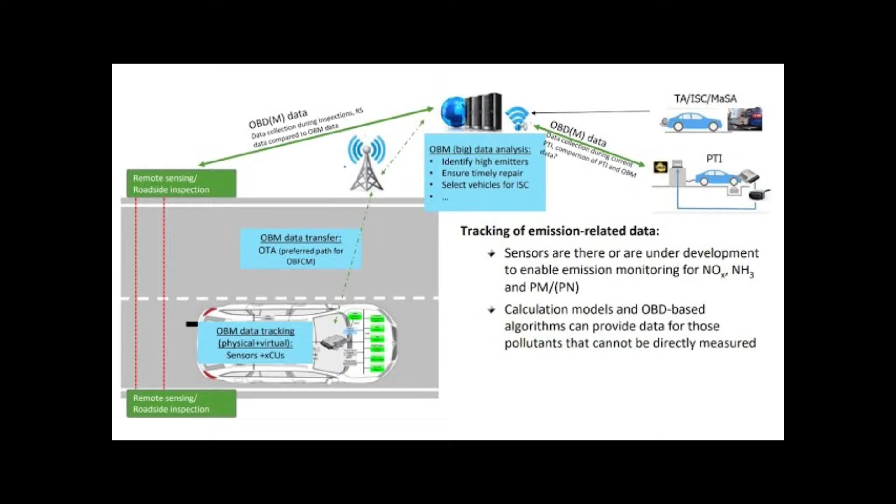We are very glad to host for this first speech of this year Professor Zisis Samaras from the Department of Mechanical Engineering of the Aristotle University of Thessaloniki in Greece. He's heading the Laboratory of Applied Thermodynamics there. He has been mainly working over the last decades on vehicle and engine emissions of air pollutants and greenhouse gases. He has led several big European projects.

He has consulted, he has advised the European Automobile Manufacturing Association, the oil industry, and the European Commission, and also national governments. And he has also co-founded 3 spin-off companies on exhaust gas after treatment, on calculating transport emissions, and on biomass gasification. So I think he can very well talk to us about technology-driven policy research and technology-driven innovation. I cannot pretend to call him Professor Samaras, so Zizi, the floor is yours.

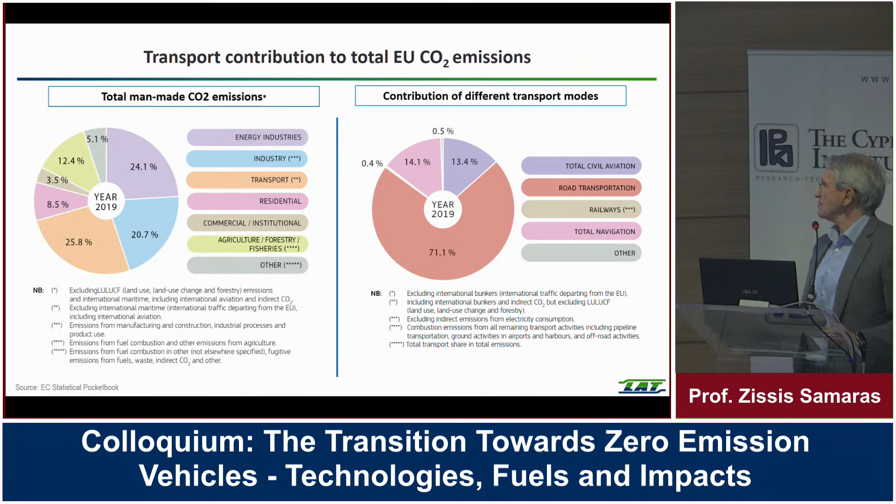And if we look at the evolution of greenhouse gas emissions from transport over the EU27, from 1990, which is the base year of all the calculations, until almost 3 years back, 2019, where our detailed statistics stop, you will see that we have some sectors or modes that are decreasing, railways in this case. Some others are increasing very fast, like aviation, as you would expect, and road transportation, which is the most important here, is fluctuating, going up and down, but at relatively high levels.

And if we go to the detail of road transportation, again, light-duty trucks and cars are the ones leading the increases. What is not shown here is the absolute numbers. Light-duty trucks do increase, however their number is small. Why do they increase? Because delivery has increased a lot over the last years and is expected to increase even further.

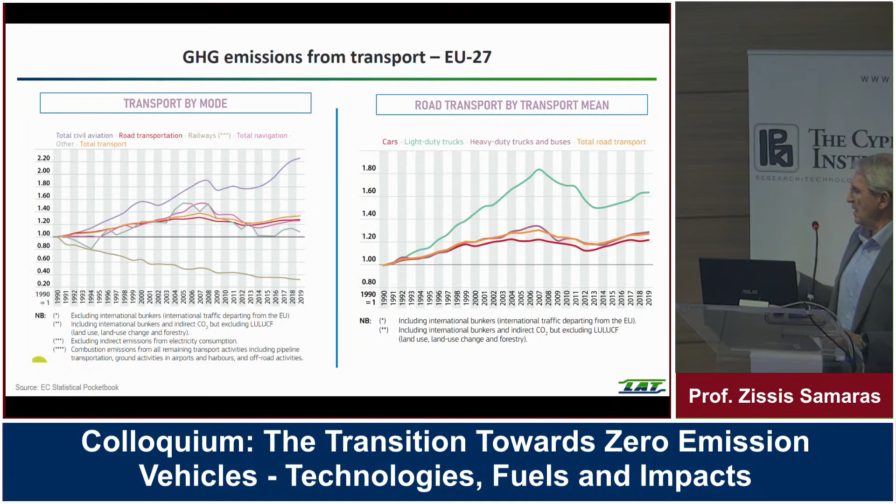As Thodoros kindly said in the beginning, we have a group in Thessaloniki that has been involved over the last 20 years in supporting the European Union as a whole, in particular DG GROW, but also DG Environment, in setting regulations, in conjunction also with the industry, both the automotive and the oil industry. We largely support our activities with a modest but up-to-date testing facility that includes 2 chassis dynos for cars and motorcycles and engine benches to make detailed measurements and analysis of energy flows and emissions from engines, looking at particular topics like cold startability.

And recently, we have been launching ourselves into electrification, looking at battery electrothermal testing, going much more into the detail of electrified vehicles, while we are always very much interested in looking at the real performance of vehicles on the road, not only in the laboratory, but also seeing what happens under real-world conditions on the road.

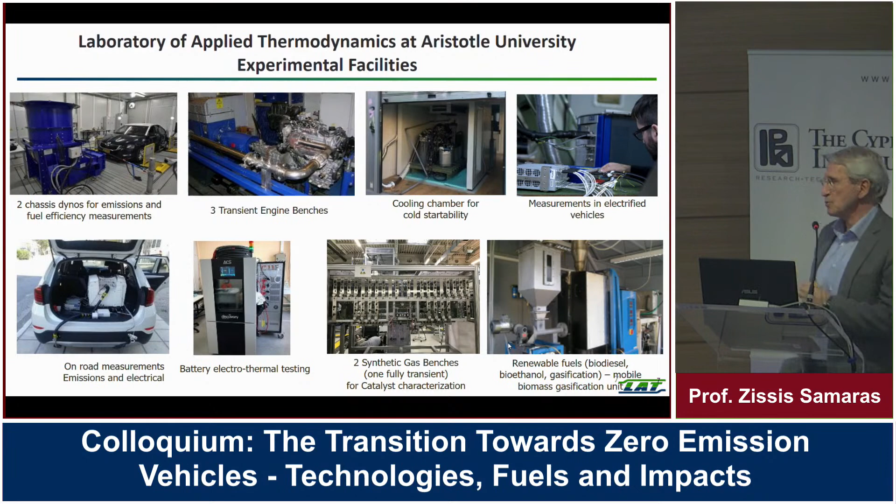And we have been looking at renewable fuels from the beginning, always in conjunction with the internal combustion engine, because the internal combustion engine is a very good device that is in a position to use energetically things that are not easily usable under other conditions. For example, gasification of biomass, which means turning a solid fuel into a gaseous fuel in order to be energetically usable.

As we have been evolving, we decided to set up as a group a spin-off company. Actually, we started with 2 spin-off companies. One was recently purchased by a bigger American company, and we are focusing now only on Emisia, trying to commercialize some of the tools and services developed at university level. These services include engineering services, such as full-scale simulation of internal combustion engines and vehicles, with particular emphasis on exhaust aftertreatment devices, catalysts, diesel particulate filters, and the like.

And recently there has been a lot of emphasis on electrification. We find many commonalities between the catalyst and the battery. They are both reactors. They are both systems that can be thermodynamically very well described, including chemistry. And we think that the methods we have developed for catalyst simulation or catalyst modeling are also applicable, generally speaking, for electrification as well.

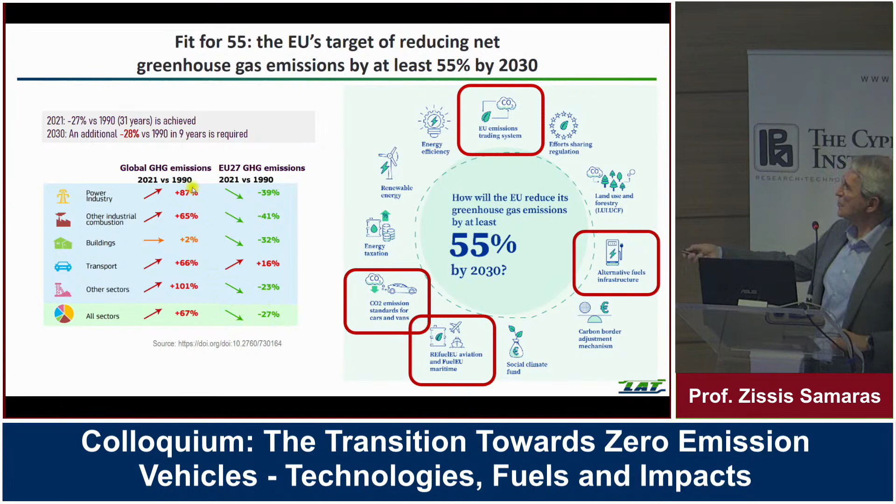Actually, if we look here at the minus 27, all sectors are minus 27 at European level. So, in principle, one can say that if these sectors reduce much more than what is requested, then there is a certain margin for transportation to not reduce so much, or maybe increase a little bit. However, we have done something like minus 27% over 31 years, from 1990 to 2021. Now, it is asked to add another 28% in roughly 9 years.

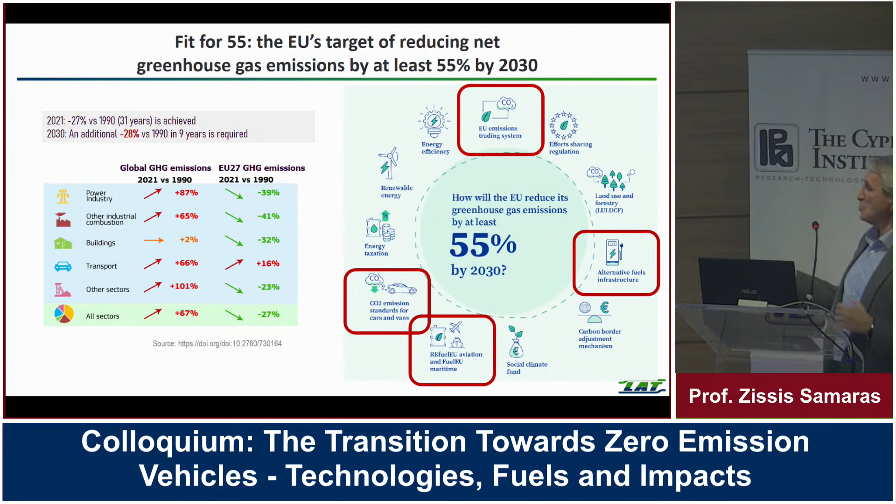Is this possible? This is a challenge, this is a bet. But this at the same time requires technologies, and not only technologies, but also a change of attitude and other approaches, under the general term digitalization, to be deployed in order to see if we are in a position to reach those targets.

If we look at road transport and CO2 emission standards for cars and vans, you see what the targets are. Currently, we are at 95 grams per kilometer. This is only an indicator, it's not reality. In reality, cars emit much more than that, something like 40 to 50% more. But this is an indicator, and the issue is not if it is 95 or 120. The question is, if you reduce 95 to 50, whether the 120 will also equally reduce. This was not happening over the last 10 years.

Actually, cars were kept constant while reducing their emissions over the regulated cycles. But if we believe, and we do believe now, that we will have this reduction, then it is expected that by 2029 we'll have a minus 15% reduction, and then by 2030 until 2034, minus 55.

This is thermodynamically impossible to be done by the internal combustion engine. This is stopped by the second and the first law of thermodynamics. Actually, the second. Yeah, this is simply not possible. So how can we do that? Not by changing the law, the law cannot change, but by changing the powertrain. And this is the big bet, and this is the big question.

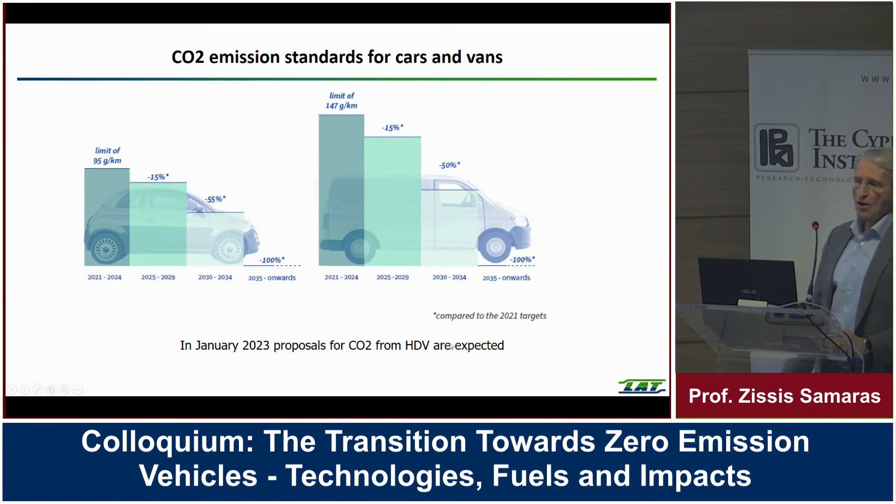And of course, it's not only about cars, it's also about light-duty trucks or vans, and we expect, with a lot of curiosity, what targets will be proposed for heavy-duty vehicles. These are not announced as yet.

Now, the preferred choice, and I will speak a little bit about it in a few minutes, is electrification. It's not electrification as the general term, which also includes hybrids and plug-in hybrids and all these combinations. No, it's BEV, battery electric vehicles only. That's the preferred choice at European level.

And there is also a second possibility, and that's called hydrogen, to be used in fuel cell vehicles. This is not stated in the previous slide. It is inferred. And by inferring that there are two basic technologies that can be deployed for these kinds of targets, then we need infrastructure. Otherwise, there is a big risk that the consumer will never buy those vehicles. Or even if the consumer buys some of those vehicles, the consumer does not use them.

And the anxiety here is called range anxiety for electric vehicles, and similarly for fuel cell electric vehicles. It is that you are running out of power in the battery and you cannot charge. Or you have to charge for maybe 3, 4, 5 hours, waiting in order to continue your trip. Unless you have a law and order kind of approach, which is impossible, I would say, this is not sustainable in our societies. Therefore, it is necessary to go on with infrastructure.

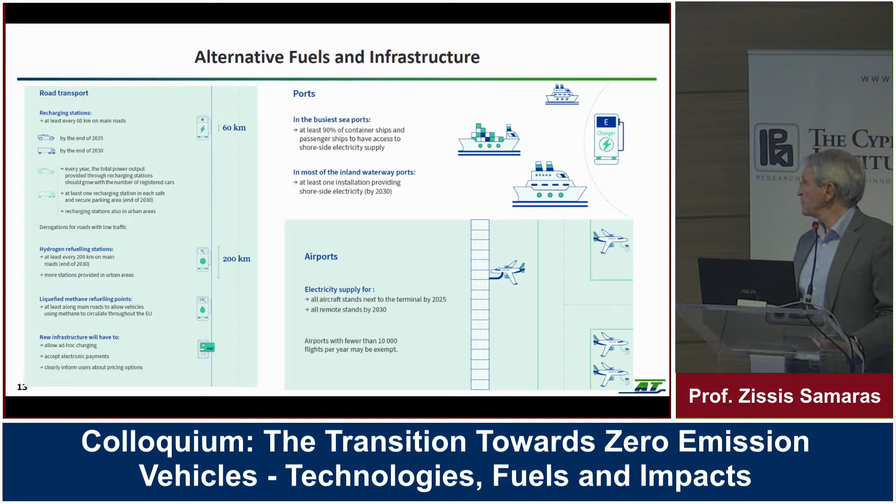But it is known that it is impossible to imagine, in the future of 2030-40, vessels being 100% electrified and aircraft being 100% electrified. Therefore, it is accepted that the solution for those vehicles is renewable fuels. So we have to continue in the direction of renewable fuels. That's why the regulation asks that by 2050, and already by 2030, a certain amount of renewable, zero carbon emission fuel be available at European level, in each country, in each airport, on average.

And something very similar, but expressed a little bit differently, for ships. For ships, what is expected is to reduce the greenhouse gas intensity of the energy used on board, with a target of 75% reduction by 2050. This means that it is given as an incentive, but also a must, to reduce CO2 emissions and change towards new directions.

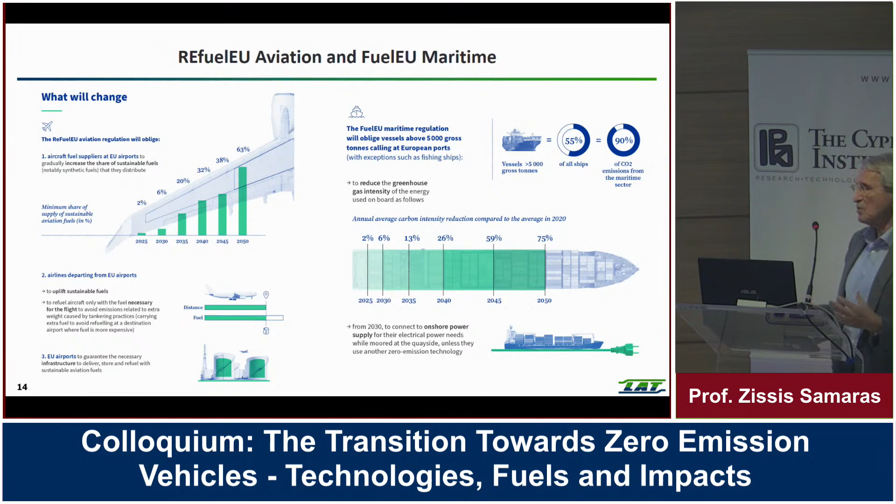Finally, something that should not be forgotten, there is the EU emissions trading system for CO2. So there is a kind of banking that has prices and can actually penalize those that emit higher CO2 emissions. Until now, transport was exempted. Now, I think the big step is that transportation will be part of the whole system.

Now, if we go to the technologies, so we said what the targets are. Maybe I should have started with the technologies, but in the end, the technologies have, to a very large extent, been decided. And I have to start with the two technologies of choice that are expected to replace the internal combustion engine. This is a very simple but standard architecture that reflects the energy flow and the related efficiencies

in a conventional vehicle. What is the major drawback here? What is the major problem in terms of efficiency? The internal combustion engine itself. It is versatile. It uses a fuel that is perfect. It is optimized to a very large extent, but it cannot exceed 40, maybe 45% of efficiency. So one half is always lost as heat to the environment. And this is the point here that actually produces more CO2 emissions than one would like to, or could possibly

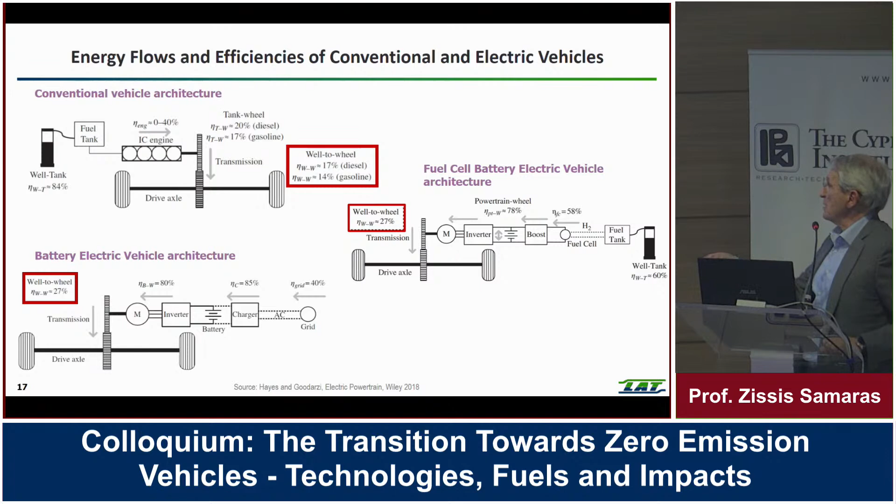Where are the drawbacks? The drawback is a little bit on the charger. In the charger, we have an efficiency of 85%, but we have this topic here. We have a 40% efficiency from the production, as an average of the production of the electric energy to be used. Where does it come from? From the average efficiency of the power production in the different power plants across Europe, across the world, as long as they are power plants operated on coal or on similar type of thermodynamic approaches. The thing is that even with this 40%, the overall efficiency is 27%. So generally, it is better than this efficiency. So by simply moving to an electric vehicle, one can gain already something like 10%, which is or should be reflected into CO2 emissions.

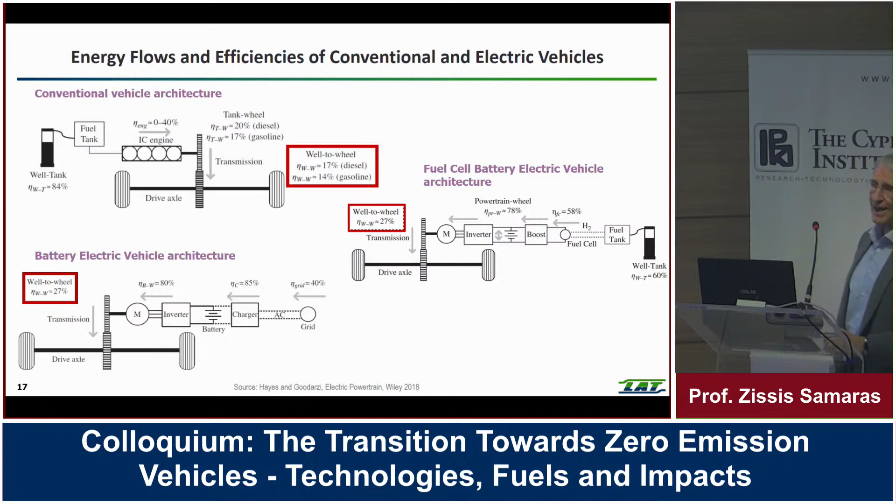And the other approach, of course, is the fuel cell battery electric vehicle. Again, this looks like the electrified vehicle. It is an electric vehicle. It only includes a fuel cell that produces electricity with something like 60% efficiency. We do have lots of electric vehicles, perfect electric vehicles, very light, very versatile, very well done. The problem with all those vehicles was and still is the battery. It is the range. While here, this fuel cell is an excellent device. The problem with the fuel cell is that we have to have pure hydrogen. Otherwise, very difficult to continue. And unfortunately, the prospects as they are today don't look very good.

But I have to say a few things about the biofuels. Biofuels are not a unique family, and they are generally considered in four generations, from 1 to 4. This first one is well known. It is actually biodiesel, bioethanol, and this is being used in all European countries already. The problem with this is that it is negative in net energy gains, and there is this contentious issue of fuel versus food, because these biofuels are coming from food-based grains.

The second generation, which is almost developed, is non-food crops, wood organic waste, food crop waste, and specifically biomass crops. This exists already. It is well advanced. It is at a TRL of almost 8 to 9. The problem is always that it is very expensive.

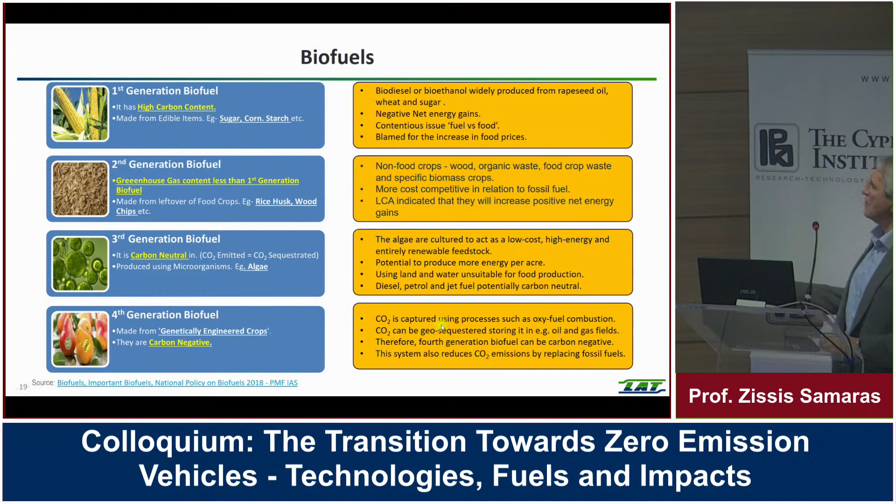And finally, the final target is the fourth generation biofuels, which, on the other hand, are very far away in the future, and probably they will not arrive anytime soon. What is very important to mention here is the e-fuel. E-fuel stands for electrofuel, and they are hydrocarbon-based fuels that can be produced on the basis of electricity. They are considered interesting and carbon neutral only when renewable energy is used for their production.

The steps, in a very simplified way, are as follows. Electricity is used to electrolyze water, and water is split into hydrogen and oxygen. Then hydrogen is combined with CO2 and CO, and can either go the way of methanation and produce methane, the so-called e-methane, or go via Fischer-Tropsch synthesis to produce hydrocarbons similar to gasoline and diesel. These e-fuels can be used in combustion engines.

The interesting thing is that we also have the direct usage of electricity and also direct usage of hydrogen. And all these need to be stored. Storing electricity is difficult. Hydrogen is not impossible, but also difficult. And finally, all these liquid fuels, or even gaseous fuels, can be relatively easily used.

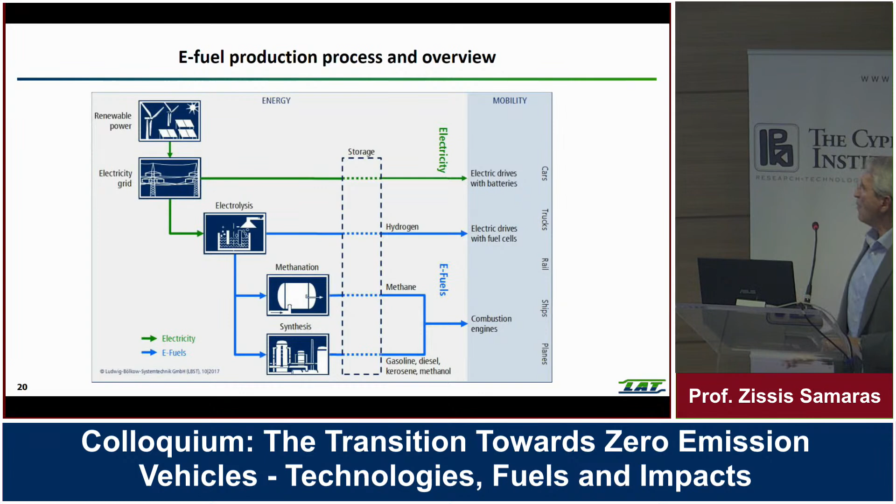Now, there is a lot of effort being done currently, and there are different chains and approaches that depend very much on where you produce those fuels or the electricity. To the left, these sketches assume that electricity is produced in Europe, and there are differences between the north, central and south of Europe. We can see different pathways going to e-methanol, for example, or even to e-ammonia. Ammonia is considered a very important fuel for maritime applications in particular.

I don't think we can even consider ammonia for road transportation. But here, in Europe, everything is limited. That's why there are all these efforts to go to other parts of the world. And here, these are calculations for MENA, for the Middle East, actually. And Cyprus is very close to it.

There are possibilities to produce the electricity and the fuel and then transport the fuel from MENA countries to Europe, or do the other thing, take the electricity and move it to Europe. This was, to a very large extent, abandoned. Usually what is being considered is really to transform this to a liquid or gaseous fuel, liquefy it, and then transport it to Europe.

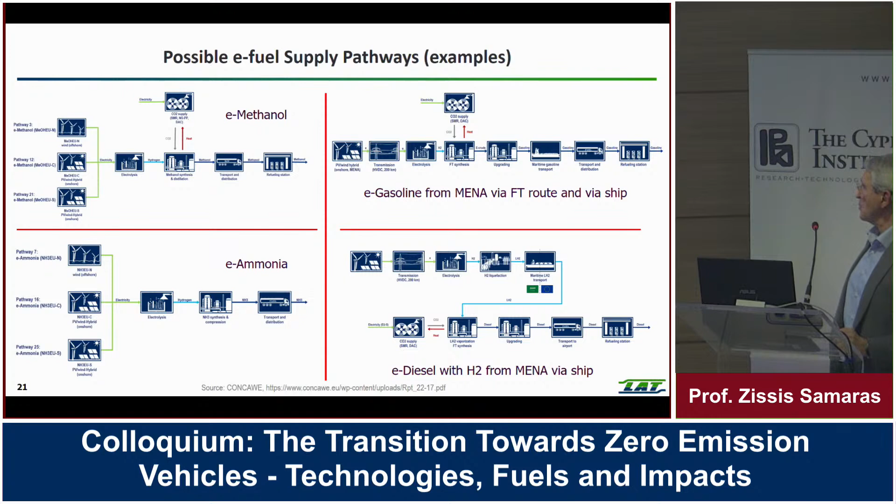I would like to say a few things about what all these possibilities mean in terms of numbers, in terms of effect on the overall system in Europe, as we saw it in ERTRAC. ERTRAC stands for European Road Transport Research Advisory Council. It is a combination of industrialists, academics and member states that support research at European level, and also provides input for the research activities at European level.

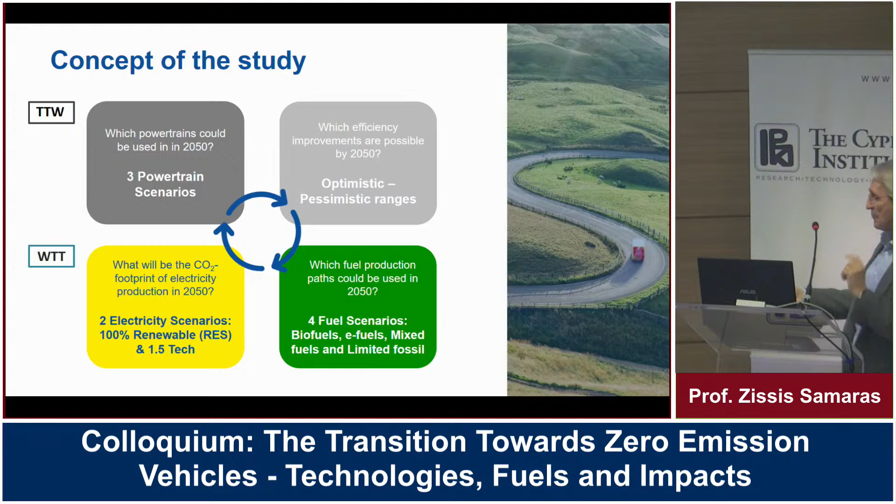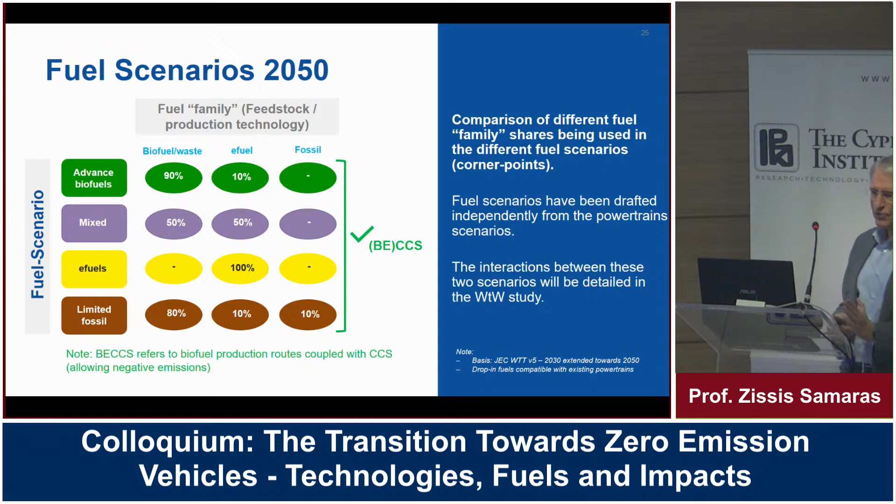So we looked at different powertrain scenarios, different optimistic and pessimistic ranges, combined with electricity scenarios, always looking at renewable and a little bit of non-renewable, and different fuel scenarios. The fuel scenarios are of particular interest. Here you can see the combinations that we looked at: advanced biofuels in one line, e-fuels, solely e-fuels, mixed and limited fossil. There is an infinity of combinations and an infinity of possible solutions to a very complicated problem.

What really needs to be kept in mind, to me at least, are these three particular graphs that attempt to calculate how much energy is necessary to produce 1 megajoule of useful energy to the tank of the vehicle. The reason why electricity is so appealing is that to produce 1 megajoule of final battery energy, you need only basically 1.1 megajoule input. So you are very close to 1-to-1. Whatever you produce, you can use directly in the vehicle.

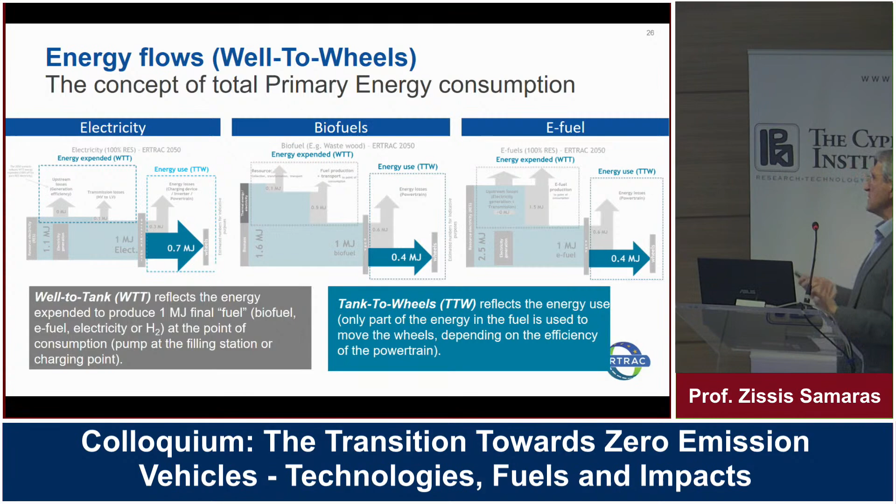If you go to biofuels, unfortunately, you need 60% more energy in order to produce 1 megajoule of tank energy, out of which, unfortunately, only 0.4 are usable. And this is the major problem of e-fuels. For 1 megajoule of e-fuel that will give you only 0.4 megajoules of usable energy, you need 2.5 megajoules of input energy. And of course this can be done, but on the other hand, it is necessary to think how one can arrive to those things.

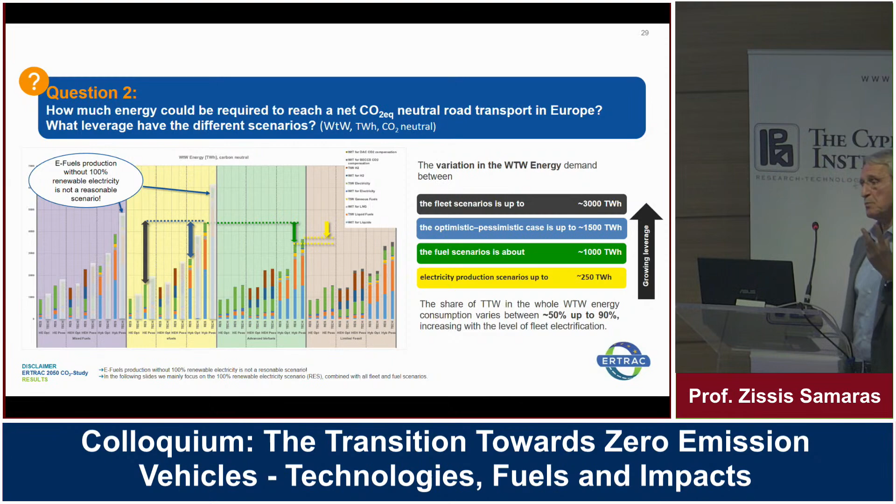So we went through a number of calculations. I don't want to go through all of these. And we saw that, looking only at the ranges of different types of energy that may be required by 2050, it is clear that a new view to the overall system of energy production in Europe needs to be visited and decided. And if we're talking about electrification in particular, we have to keep in mind that we will need an add-on 40% of electricity generation in order to be in the position to power our fleets.

In between, as I said, Euro 7 is providing a number of additional opportunities that attempt to make our conventional vehicles as clean as possible. And this includes fuel and technology neutral emission limits, so there is no difference between diesel and gasoline. There are new pollutants like ammonia, N2O, and others. And also, in-vehicle battery durability is considered to be an important aspect of Euro 7.

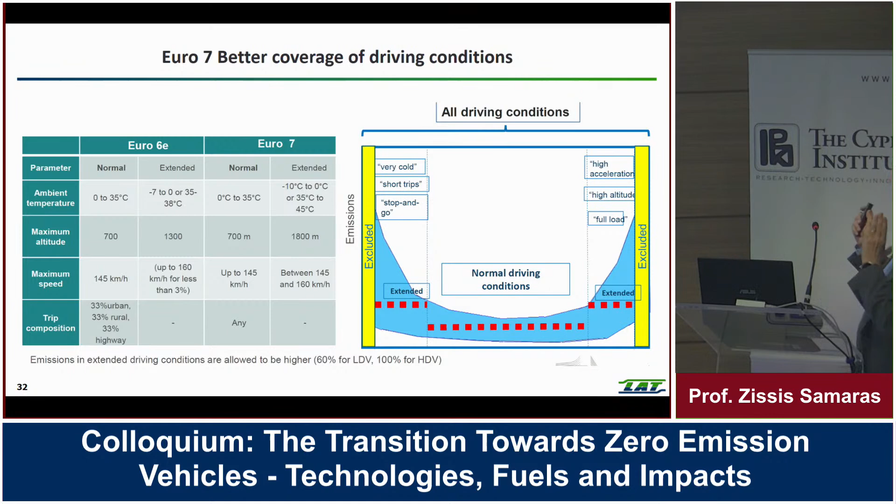The final topic which is important here is that digitalization of the vehicles is on the way. And what has been decided is that there will be a centralized follow-up of the operation of the vehicle via the so-called onboard monitoring systems, which means using existing sensors and adding new sensors on the vehicles. With these sensors, we will start with NOx emissions, ammonia, and PM, particulate matter. All this information has to be analyzed on board, transmitted to a central computer, and then analyzed at a higher level.

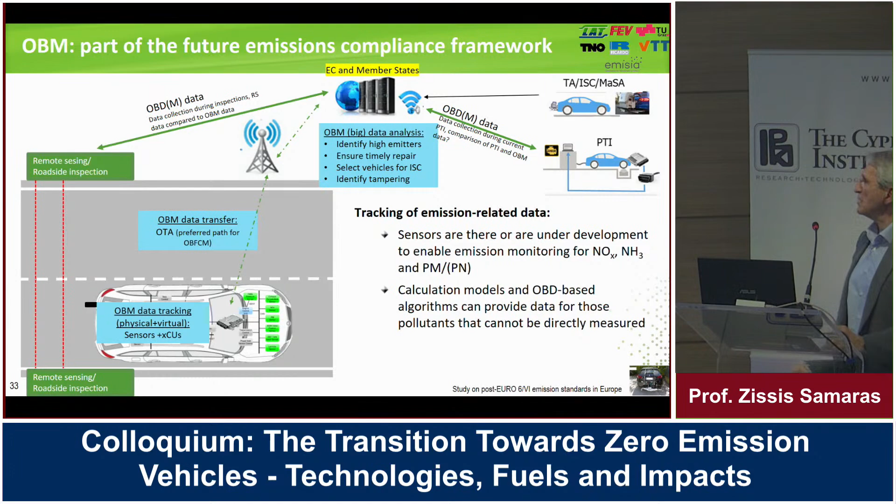Maybe this information can also be combined in big databases with type approval data, with PTI, periodic technical inspection data, as well as remote sensing data that are being collected across Europe, which means a centralized system is currently being deployed that gives the opportunity to have a full follow-up of the operation of those systems. And this is just an evolution of existing technologies that were already developed in different vehicles.

I think I exceeded my time a little bit, but the message, at least from my side, without necessarily going through all the details of the conclusion, is that Europe is betting on technologies that were not available in Europe and are currently being much more developed, or there is a big effort for them to be developed, maintained and used. When I was studying mechanical engineering several decades ago, it was clear to me that the battery was the drawback and the bottleneck in the development of the electric vehicle already in the late 1800s, when the first vehicles started appearing, which were electric, of course.

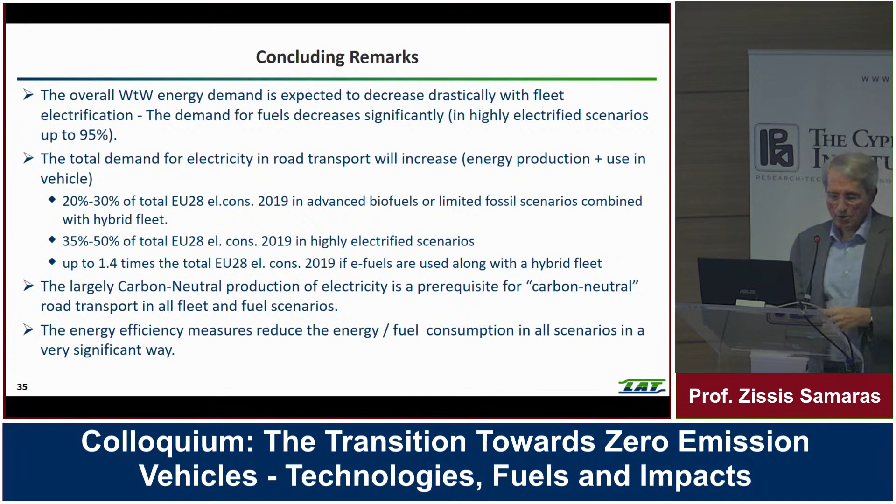Now it seems that the usage of the vehicle, the possibility of monitoring the operation of the vehicles and of the batteries, the interconnection of the data, providing specific and customized guidance to the drivers, may give new opportunities for alternative technologies. Although there are many topics that still need to be looked at, which is a very good thing, of course, for researchers like us, I still believe that the mass deployment of these new technology vehicles, if successful, which I honestly believe it has to be and it will be, will give additional opportunities for Europe to lead some of these developments at global scale.

The final point that I think comes out from all these discussions is that we can no longer continue looking at closed systems. For example, putting simple emission limits for a vehicle at the tailpipe is not sufficient, because this way you can promote technologies that otherwise may introduce important negative effects. That's why life cycle analysis should be further developed and standardized to a very large extent, and that's the reason why there is a need for information coming from all sides, in order to make us a bit more intelligent and take wiser decisions in the end.